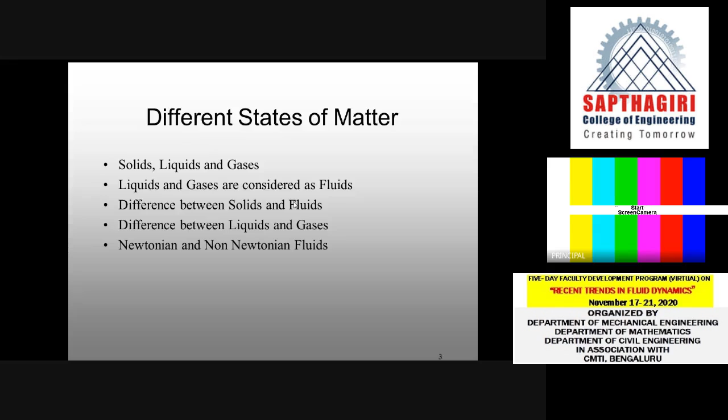Then we have a special category of fluids known as Newtonian fluids and non-Newtonian fluids. There is a law known as Newton's law of viscosity. If any fluid obeys Newton's law of viscosity, we call it a Newtonian fluid. If any fluid does not obey Newton's law of viscosity, we call it a non-Newtonian fluid. I'll come to Newton's law of viscosity and examples for Newtonian and non-Newtonian fluids later.

Now the question is, why are we giving a lot of importance to fluid mechanics, not only in this particular workshop or FDP, but even other than that? Usually fluid mechanics is one of the thrust areas. Why we consider fluid mechanics most important, that is the thing.

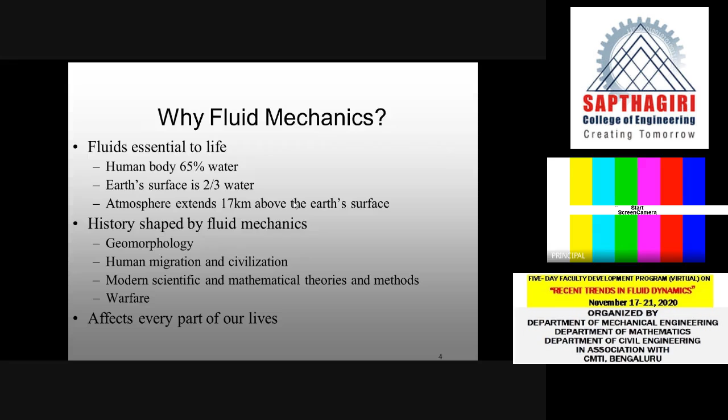First, fluid is very much essential to life. It is found that almost 65% of the human body contains water. Earth's surface is surrounded with two-thirds water. The atmosphere extends 17 kilometers above the Earth's surface, and there is even a historical background for the importance of fluid mechanics.

The fluid mechanics equations have frequently been taught to students. Students have heard of and we have frequently referred to things like Archimedes' principle, Newton's second law of motion, Bernoulli's equation, Euler's equation, Navier-Stokes equation, and Reynolds number. So many things we have taught in class. But I don't know whether we have really shown students the scientists who are really responsible for these concepts.

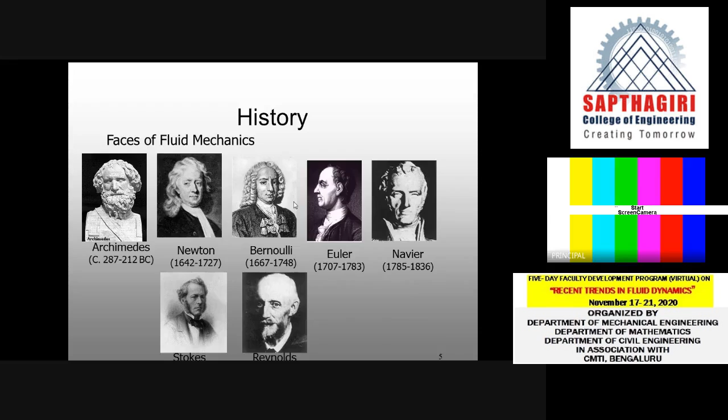I would like to present this particular slide where you can see the photographs of all these scientists. If these scientists had not been there, fluid mechanics concepts would not have been there today. That is why I think it's very important to give respect to these scientists, and at least by seeing their photographs, we'll try to respect them. You can see the photographs of Archimedes, Newton, Bernoulli, Euler, Navier, Stokes, Reynolds, and other such people here.

Now I will not go into this, we all know this. Fluid mechanics is a branch of science which deals with fluids either at rest or in motion. Fluid mechanics can be mainly classified into three types: fluid statics, fluid kinematics, and fluid dynamics. The study of fluids at rest we call fluid statics. The study of fluids in motion without considering the external forces acting on the fluid we call fluid kinematics. The study of fluids in motion considering the external forces acting on the fluid we call fluid dynamics.

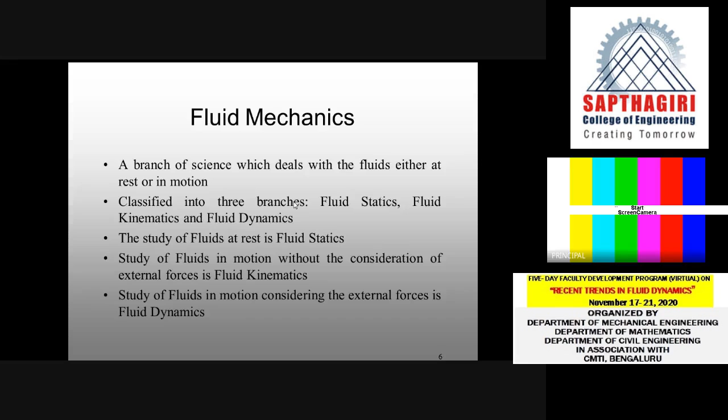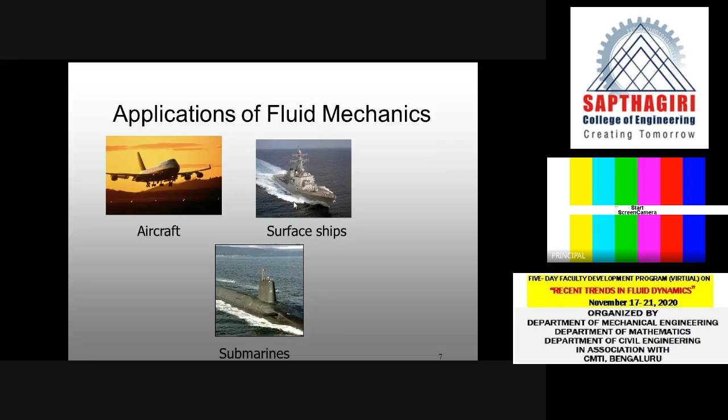Anyway, the importance of today's topic is related to fluid dynamics only. If you ask me what the applications of fluid mechanics are, I will ask you in turn where exactly the applications of fluid mechanics are not there, right? Because there are plenty of applications of fluid mechanics, starting from aircraft, surface ships, air pollution, river hydraulics, blood pumps, water sports, hurricanes, and so many things.

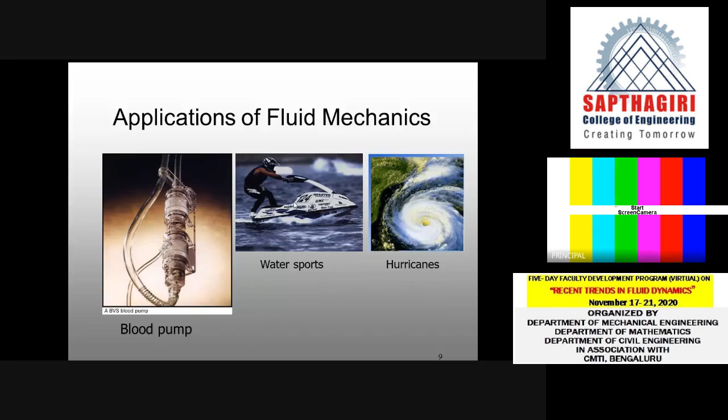If you consider it machine-wise, that is, which machines operate based on the concept of fluid mechanics, there are many machines. Many of them, the prominent ones, include engines, turbines, compressors, pumps, rockets, jets, heat exchangers, etc.

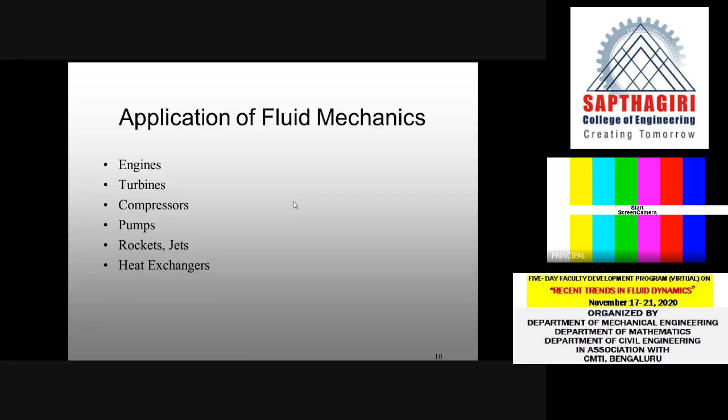There are two approaches which we usually commonly use in fluid mechanics. One is known as the Lagrangian approach, the other is the Eulerian approach. In the Lagrangian approach, each and every fluid particle is followed during its motion. You know that during the motion of a fluid, there are many fluid particles which are flowing.

Each and every fluid particle is followed during its motion, and for each fluid particle we try to measure the velocity, pressure, density, etc. Whereas in the Eulerian approach, we don't follow each and every fluid particle. Instead, we allow the fluid particle to pass through a cross section, and at that cross section we try to measure the velocity, pressure, density, etc. of the fluid particle. So the second approach is a little easier compared to the first, because in the first approach you are supposed to follow each and every fluid particle, which is very, very difficult, and you must describe the properties of each fluid particle. That is why in fluid mechanics applications, the Eulerian approach is commonly used compared to the Lagrangian approach.

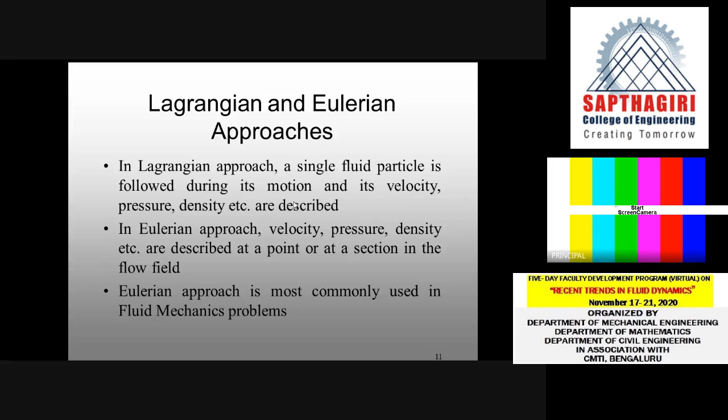Now let me come to this. We have different types of fluid flow like steady, unsteady, uniform and non-uniform, laminar and turbulent, compressible and incompressible, rotational and irrotational, one, two, three-dimensional. I will not go into the details of this. In some cases the fluid properties vary with respect to time, in some they do not. In uniform flow, velocity is not a function of space; in non-uniform flow, it is a function of space. Compressible and incompressible we have already considered. So we have different types of fluid flow as well.

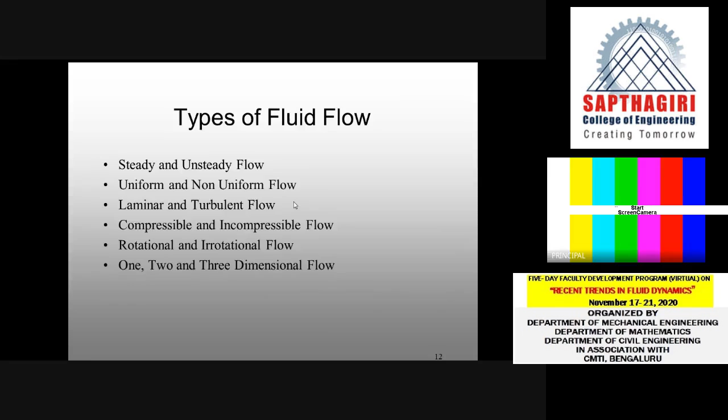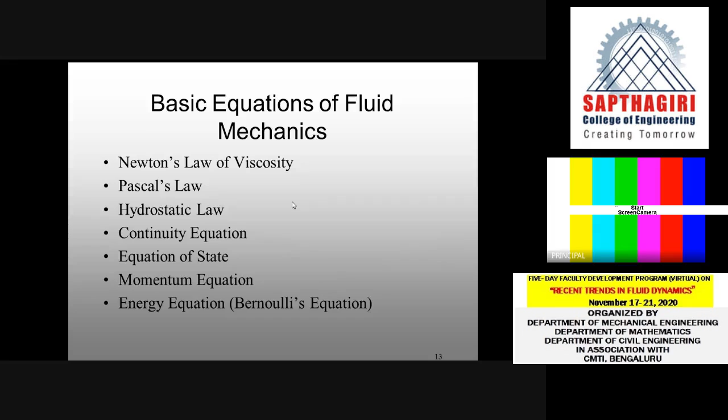Now I would like to concentrate more on this, because everything we talk about in computational fluid dynamics or fluid dynamics is based on the fundamental equations of fluid mechanics. So what are the basic equations of fluid mechanics? These are the basic equations which can be listed. Without them, none of the fluid dynamics concepts, fluid kinematics concepts, or fluid statics concepts can exist. It starts with Newton's law of viscosity, then Pascal's law, then hydrostatic law, then the continuity equation, then the equation of state, then the momentum equation. Finally we have one more equation known as the energy equation, which can also be called Bernoulli's equation. So one by one, let us consider them.

Newton's law of viscosity, I have already told you about. Based on Newton's law of viscosity, we classify fluids as Newtonian fluid and non-Newtonian fluid. Newton's law of viscosity states that the shear stress exerted between two fluid layers is directly proportional to the rate of shear strain. Any fluid which obeys Newton's law of viscosity we call Newtonian; any fluid which does not obey it we call non-Newtonian. There are plenty of examples of Newtonian fluids, including water, air, petrol, kerosene, diesel, etc. They are all Newtonian fluids.

But if you ask students or even teachers to list some non-Newtonian fluids, I don't know how many would be able to. Let me tell you now, there are plenty of non-Newtonian fluids. Our blood is a non-Newtonian fluid. Toothpaste gel is a non-Newtonian fluid. Butter is a non-Newtonian fluid. All plastic fluids are non-Newtonian fluids. Suspensions and slurries are also non-Newtonian fluids.

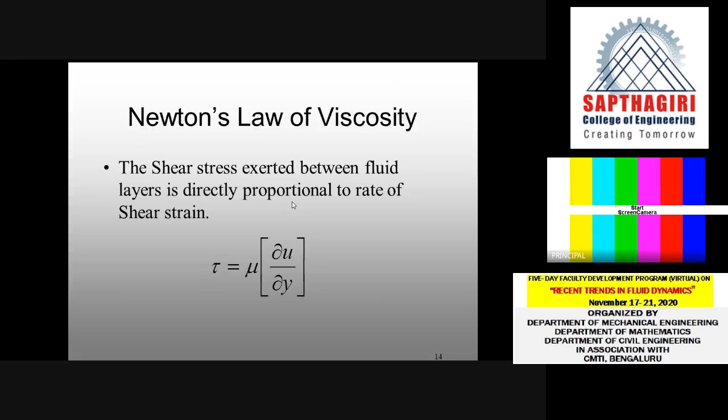Now let us come to Pascal's law, which we study in hydrostatics, that is fluid statics. According to Pascal's law, the pressure at a point in a static fluid is the same in all directions. That is, if you consider the pressure in the x, y, and z directions in a static fluid, it remains the same in all directions.

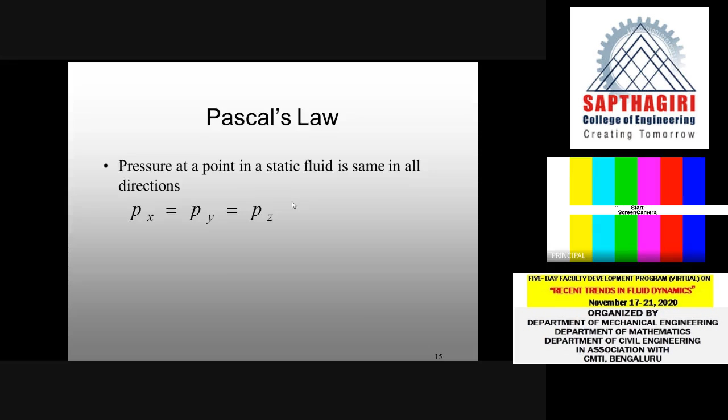Then let me come to the hydrostatic law. According to hydrostatic law, the pressure head of a fluid is the ratio of the pressure of the fluid to its specific weight. P is the pressure of the fluid, and rho g is the specific weight. The most important application of hydrostatic law can be observed in a swimming pool. You know we usually say a swimming pool has a depth of 4 feet, 5 feet, 6 feet, like that.

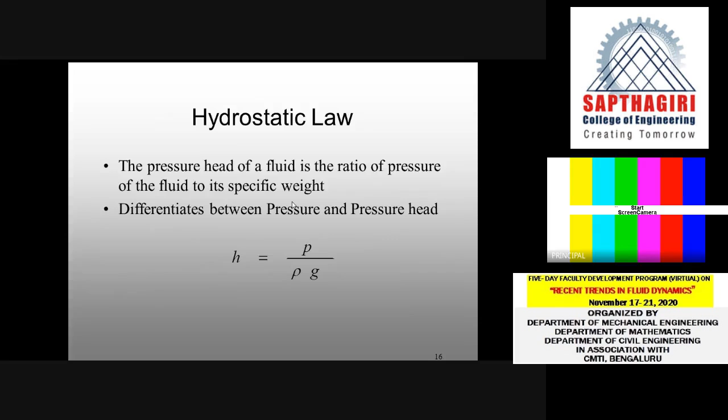It is a common tendency to ask: if you go to a depth of 2 feet inside water in a swimming pool, what will be the pressure? And if you go to a depth of 4 feet, what will be the pressure? We all know that at 4 feet, the pressure will be more than at 2 feet. That means as the depth increases, the pressure also increases. That is very much evident, and it is proved by hydrostatic law only. That is how the hydrostatic law plays a very important role in such applications.

Now let us define two very important non-dimensional numbers, especially these two that take a lot of significance in the study of computational fluid dynamics. One is the Reynolds number, the other is the Mach number. Reynolds number is the non-dimensional number used to predict the nature of incompressible fluid flow, while Mach number is a non-dimensional number used to predict the nature of compressible fluid flow.

Whenever we are analyzing a liquid, we analyze it through Reynolds number. Whenever we are analyzing the flow of a gas, we analyze it through Mach number. Reynolds number is defined as the ratio of inertia force to viscous force, and it is a very important non-dimensional number which signifies the nature of flow, telling us whether the flow is laminar or turbulent.

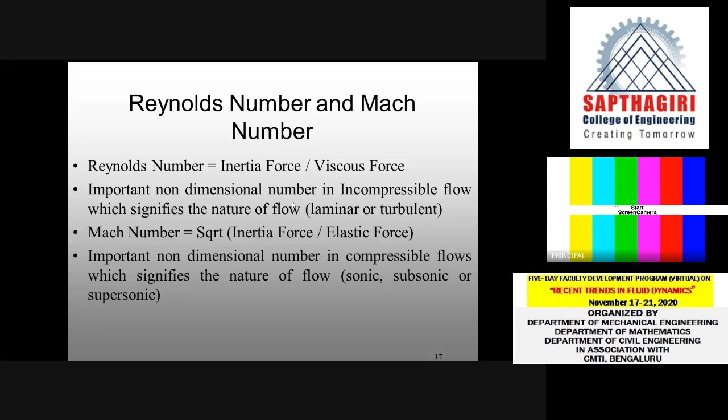Similarly, Mach number is defined as the square root of the ratio of inertia force to elastic force, and it is a very important non-dimensional number used in compressible fluid flow. It signifies the nature of the flow—based on the value of Mach number, we can say whether the compressible flow is sonic, subsonic, or supersonic.

Now let me come to fluid dynamics. Fluid dynamics is a very important branch of fluid mechanics which deals with fluids in motion, considering all the external forces acting on the fluid. So whenever the fluid is in motion, what could be the different forces acting on it? There are different forces like force due to pressure, force due to viscosity, and force due to turbulence.

Sometimes there are some body forces. What do you mean by body forces? Body forces are the forces due to the self-weight of the fluid. Then there could be some forces due to surface tension, etc.

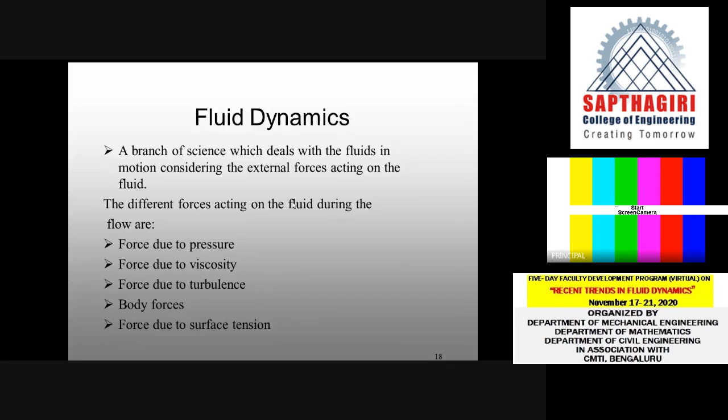So now, before I start with the concepts of CFD, let me come to CFD. CFD is very important because, to analyze fluid flow, you can use three important methods: one is the experimental method, the second is the theoretical method, and the third is the numerical method.

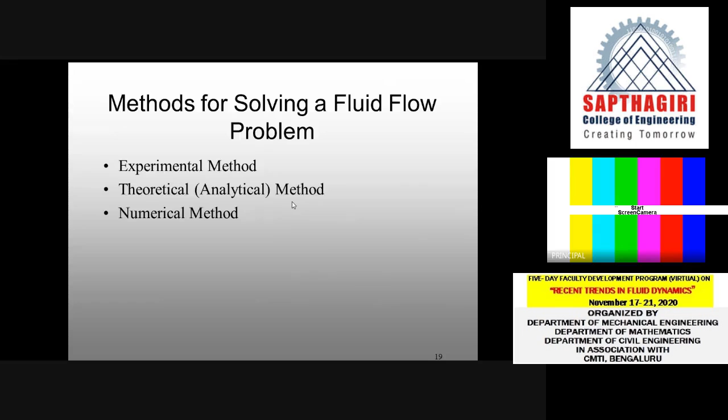Whenever I consider a fluid flow problem, I can also solve such a problem for heat transfer. That is why, whenever I talk about a fluid flow problem, I also bring in heat transfer, because to solve any heat transfer or fluid flow problem, three approaches can be used: the experimental approach, the theoretical approach, and the numerical approach. That numerical approach, we call CFD. Let me come to that later. First we talk about the experimental, theoretical, and numerical approaches, then we compare all three, and then in particular we talk about the numerical approach.

You know that people doing PhD, or those who have already completed it, especially faculty members, might have heard that your PhD will have more value if it is substantiated with experimental results. If you don't have substantiation with experimental results, validation may be a big problem—though you may validate it with some literature, that's a different case. But experimental results are more courageous and are respected more compared to analytical or numerical results, because experimental results are capable of being more realistic.

We have an equipment with us and we have the ready-made, or we have got the proven values with us, right? With all this, we can prove a concept. So that is why the experimental methods or experimental results are more respected compared to analytical results or numerical results.

There are disadvantages also in the experimental approach. To do any experiment, equipment is required, so the equipment will be very, very costly. There may be a scaling problem. For example, if you want to do the experiment with a hydraulic turbine, you cannot build the experimental setup of the actual hydraulic turbine. You will have to build a small one. So how do you scale it is the problem.

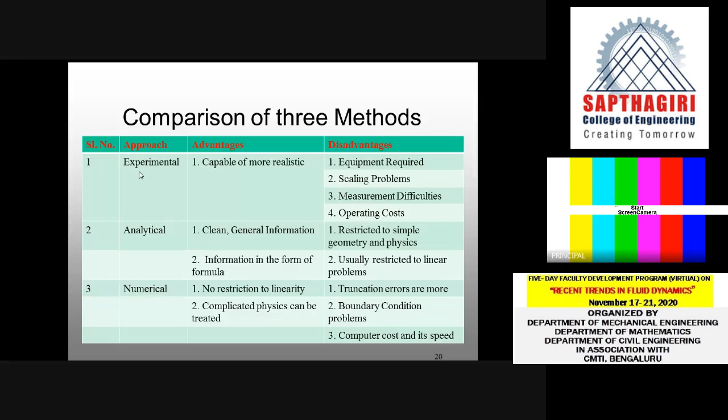So then, what is computational fluid dynamics? Computational fluid dynamics, as it is said, means we are trying to solve a fluid dynamics problem using a computational method. Such a thing we call computational fluid dynamics. So CFD is going to predict what will happen or what may happen quantitatively when the fluid flows with these conditions. What are those conditions?

There could be a simultaneous flow of heat apart from fluid flow. There could be simultaneous mass transfer apart from fluid flow. There could be simultaneous phase change apart from fluid flow. There could be some chemical reaction apart from fluid flow. Sometimes there may be mechanical movement also. CFD can handle this kind of problems.

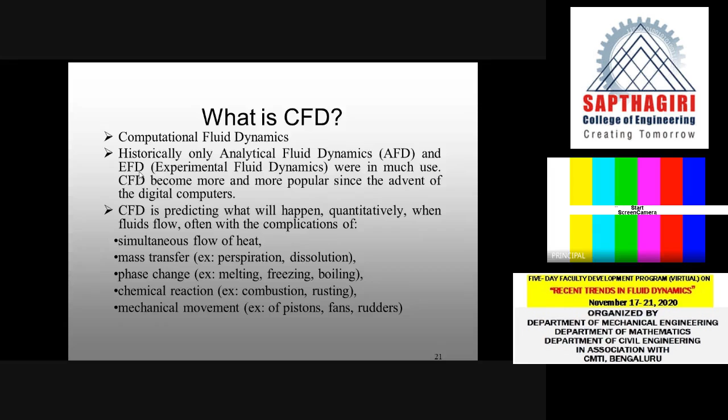So then, what are the steps involved in CFD? First, we need to understand the physics of the problem. What do you mean by physics of the problem? Let me give you an example. Let us say I will take a very simple example. Water is flowing through a pipe, right? When the water is flowing through a pipe, what we need to measure or predict there, maybe one is the velocity of the fluid. The other one is what may be the pressure at the inlet, what may be the pressure at the outlet.

To do this, first we need to understand the physics of the problem properly. Then we'll have to do the modeling. Then we'll have to define the proper boundary conditions. Then we'll have to solve it numerically. Then we should present the results in the form of visualization. If you want to complicate the same example a little bit more, I will say that water is flowing through a pipe, but the pipe is kept in the sunlight at 12 o'clock in the afternoon.

What happens now? Sunlight is going to be there on the pipe. Naturally, the pipe surface gets heated. From the surface of the pipe, the heat is transferred to water. So there may be conduction effects, convection effects, and radiation effects also from the sunlight to the surface of the pipe. All these things can be added apart from solving the pressure and the velocity of the fluid. All these things are going to be dealt with in a proper way in computational fluid dynamics or CFD.

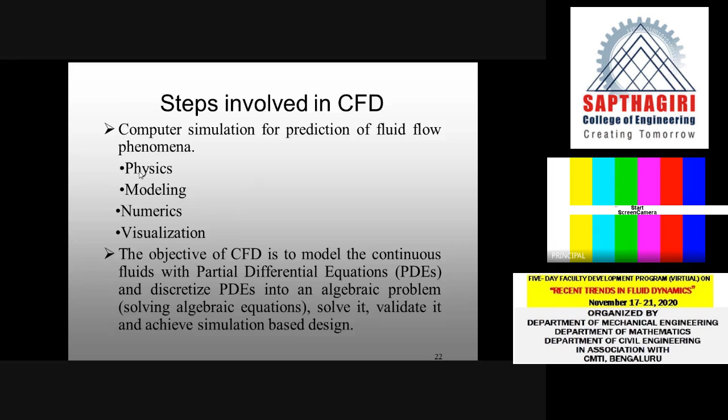Then try to convert the physics of the problem either to an ordinary differential equation or to a partial differential equation. Then try to solve that ordinary or partial differential equation using some suitable method. This is what we do overall in CFD.

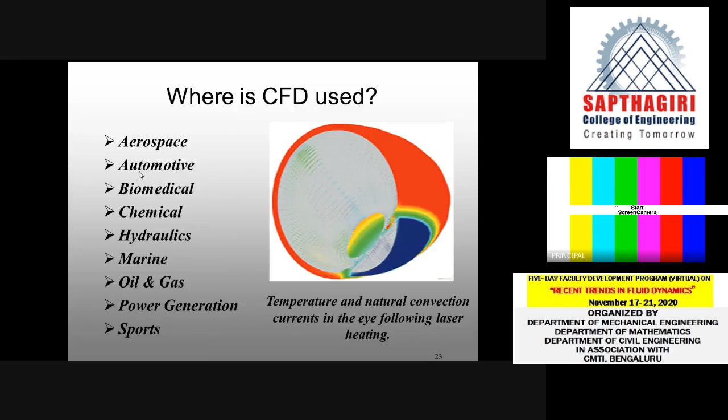Okay, now the next thing, I have given the heading as where is CFD used. I should give the heading as where is CFD not used. In fact, nowadays CFD has become a trend; it is used everywhere, including in aerospace, automotive, biomedical, chemical, hydraulics, marine, oil and gas, power generation, sports, etc. The figure you can see in this slide also shows temperature and natural convection currents solved using CFD. Anyway, I will not go into the details of that.

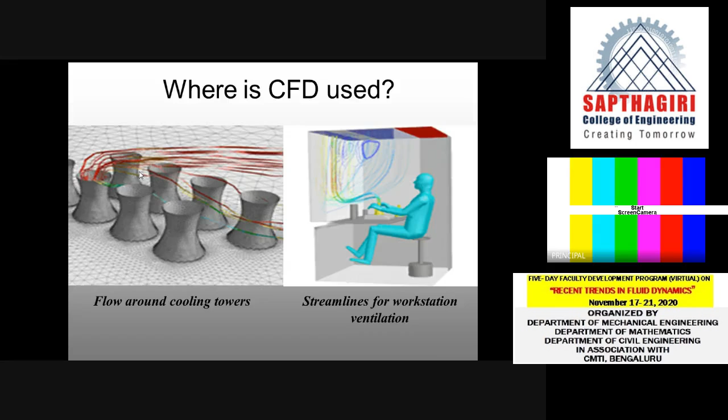You can see some more things which are solved using the CFD technique. The first one is flow around a cooling tower. The second one is streamlines for workstation ventilation. These are some of the studies carried out using CFD. Nowadays, even in biomedical science, people are using CFD. The blood pressure can be controlled using CFD, and also the blood pumping to the brain can be analyzed using CFD.

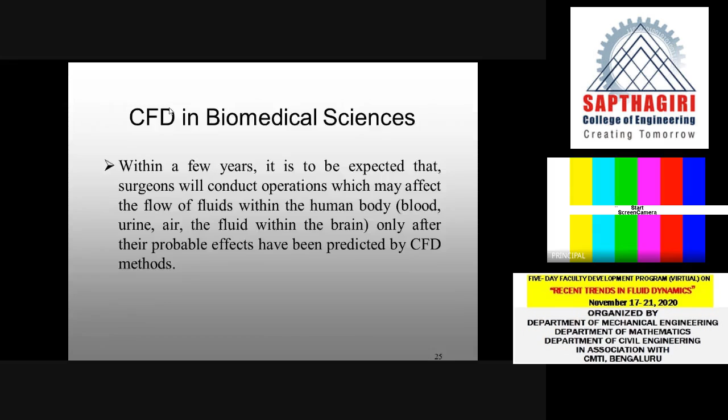And the urine amount can be predicted using CFD. So a lot of applications are there, even in biomedical sciences. Already our doctors are using this technique to predict all this. So now the question is, can CFD be really trusted? If you ask me personally, I say no, you cannot trust CFD completely. Why can you not trust CFD completely? I will come to the details of that a little later.

Now, importantly, three things. First, the input data may involve too much guesswork or imprecision. That means, let us say we wanted to solve a problem using the Navier-Stokes equation. The Navier-Stokes equation has a lot of terms, so it is very difficult to solve all those terms together. That is why we make some assumptions and then try to solve the equation. When you make assumptions, you will get the result, but it may not be exactly near the actual one. So that is the major problem with CFD.

The available computer power may be too small for high numerical accuracy. The scientific knowledge base may be inadequate. I think that is the most important thing. The scientific knowledge base may be inadequate in the sense that whatever boundary conditions we give may be wrong because of our limited knowledge about the physics. If we have defined the physics itself wrongly, naturally the result will also be wrong. That is why CFD cannot be 100%.

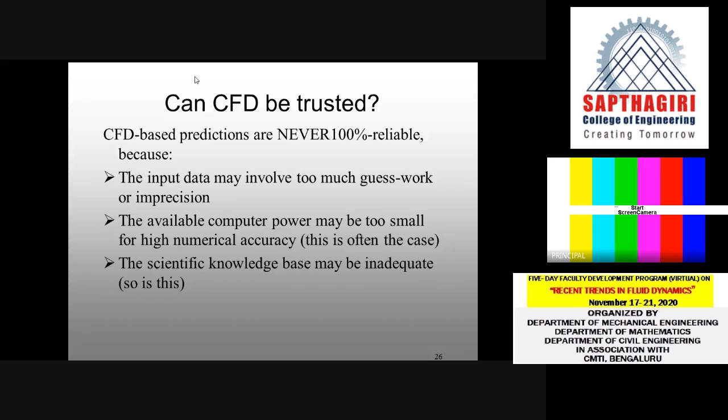CFD is more reliable in solving single phase flow rather than multi-phase flow. CFD solutions can be more reliable for chemically inert gases rather than chemically reactive materials. The CFD results are more reliable for simple fluids rather than those of complex composition. So therefore, for everything you cannot depend on CFD, but you cannot leave CFD also.

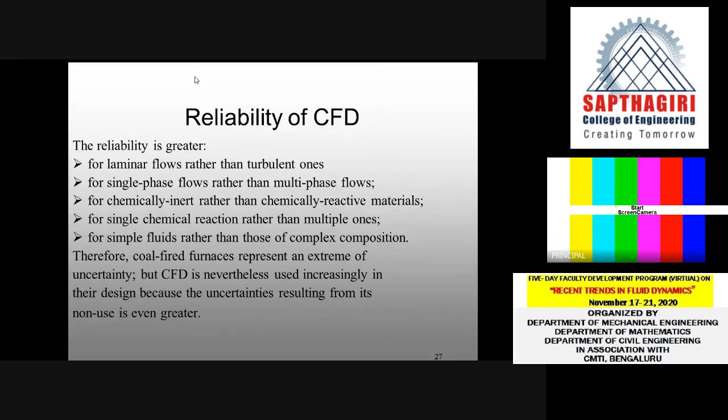First, we need to understand the fluid mechanics: whether it is an inviscid flow or viscous flow, laminar or turbulent, compressible or incompressible. Then we are supposed to convert the physics in the form of equations. After converting the equations, we'll have to solve them using some proper numerical method. Then we will have to analyze the results. This is all about CFD. Okay, I have told you already.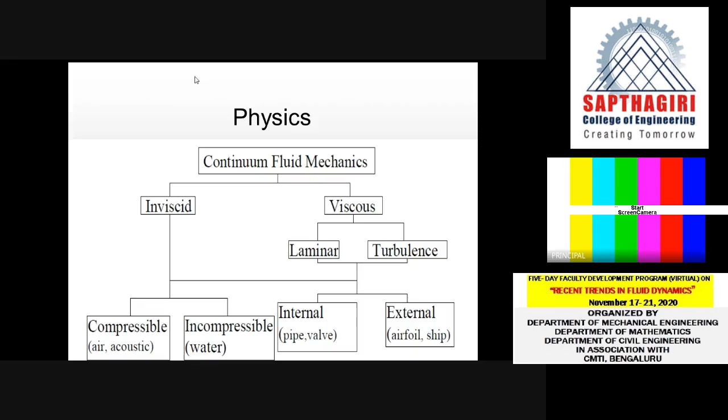So first you will have to do the discretization. After discretization, convert the physics of the problem to either an ordinary differential equation or a partial differential equation. Then that will get converted to a system of algebraic equations. Try to get the numerical solution of these equations using a proper condition.

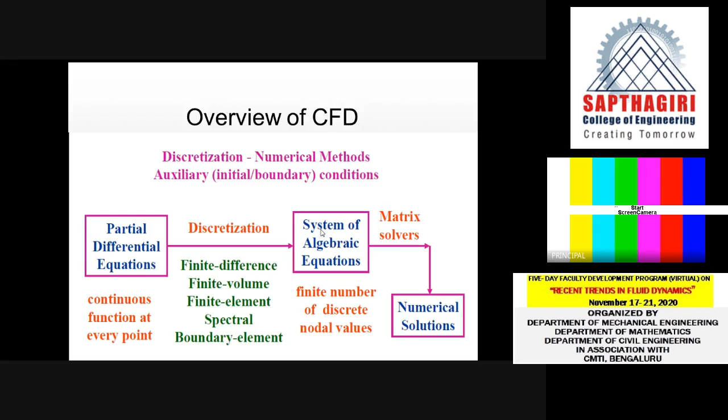To do this, usually in CFD, we use three important methods. One is the finite difference method, the second one is the finite element method, and the third one is the finite volume method. Usually the finite difference method is based on the differential equations. In the finite volume method and finite element method, we try to convert the physics of the problem in the form of an integral equation rather than a differential equation.

What are the flow conditions you will usually come across while studying CFD? The flow may be viscous or inviscid, external or internal, laminar or turbulent, compressible or incompressible, single phase or multi-phase, or it may include thermal effects, density effects, etc.

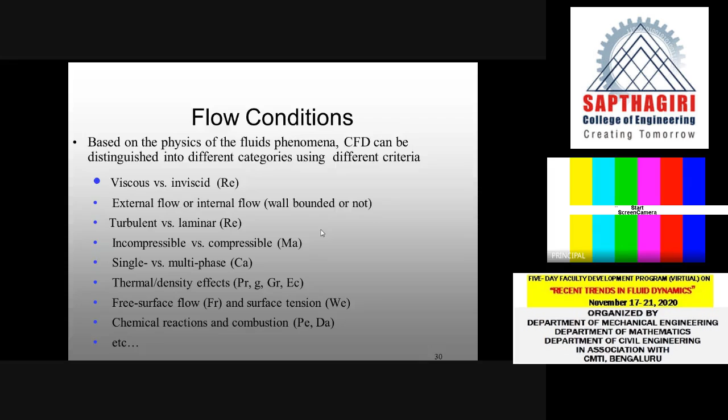But before that, let me talk about some basic equations. Let us start with the continuity equation. I don't want to go into the equation; let me only tell you its overall meaning. The continuity equation is based on the law of conservation of mass. Whatever amount of fluid enters a section, the same amount should leave the section. Mass of fluid entering a section should equal mass of fluid leaving the section.

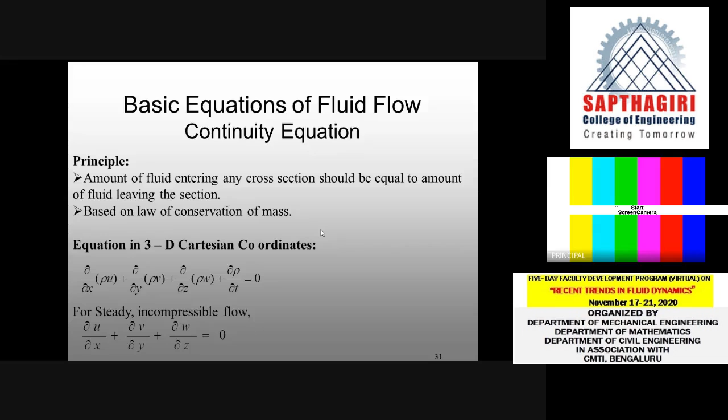Usually these equations are written in three-dimensional fashion as ∂(ρu)/∂x + ∂(ρv)/∂y + ∂(ρw)/∂z + ∂ρ/∂t = 0. Further, these equations can be reduced for incompressible fluid flow as ∂u/∂x + ∂v/∂y + ∂w/∂z = 0.

Now the next one, I take only 2 to 3 minutes for this slide, because the entire fluid dynamics depends on this equation, which we call the momentum equation, also known as the Navier-Stokes equation. The Navier-Stokes equation looks very simple. It is based on Newton's second law of motion, F = ma. The problem looks very simple, but it is not so simple.

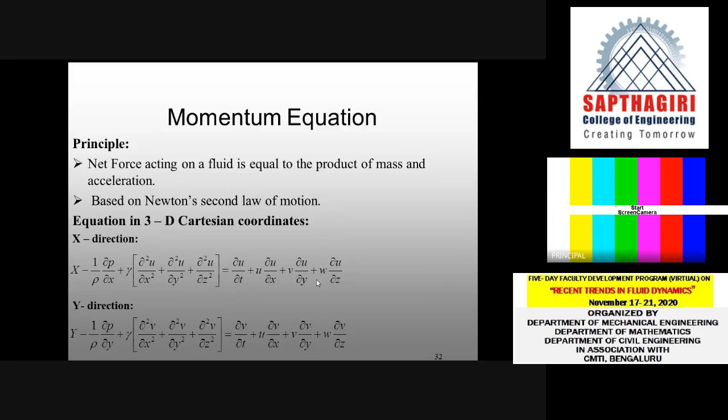As you can see, the momentum equation in X, Y, and Z direction, if you try to solve that simultaneously in all three directions, it's very, very difficult to solve because there are so many terms involved in this. That is why we try to do some assumptions.

What kind of assumption? Sometimes we tell that there is no viscosity. Sometimes we tell that there is no force due to pressure. Sometimes we tell that there is no body force. Sometimes we tell that the acceleration of the fluid is zero. By doing this kind of assumption, then only we try to solve the Navier-Stokes equation or the momentum equation.

At this juncture, I should tell you that so far, the solution of the Navier-Stokes equation is one of the thrust areas. Nobody is able to solve the Navier-Stokes equation keeping all the terminologies intact. Nobody is still able to solve the Navier-Stokes equation completely. Whatever solutions are available for the Navier-Stokes equation, all those solutions come with a lot of assumptions only.

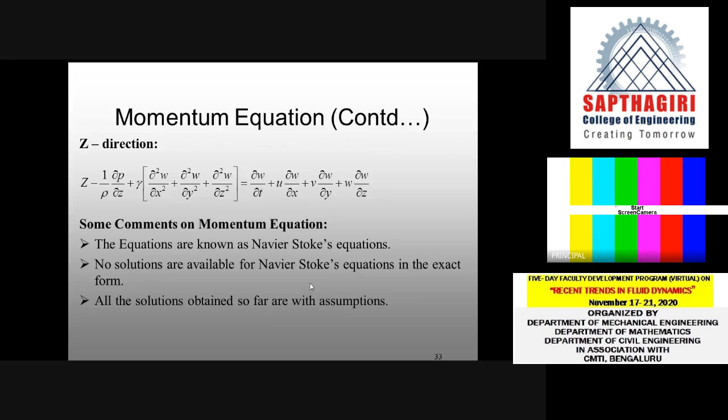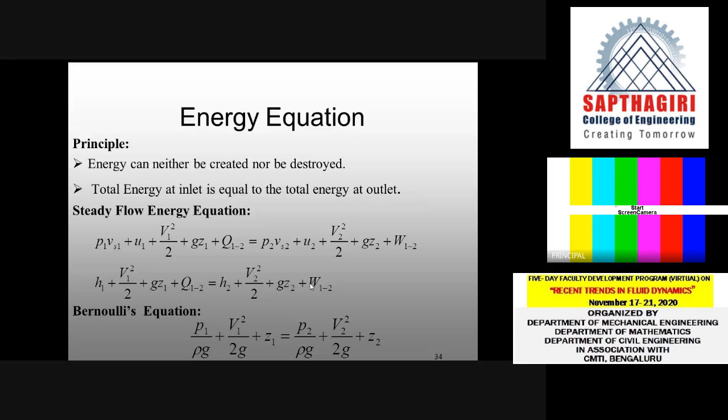So that is why this equation plays a very important role in the solution of CFD. Then the energy equation, which we also call the steady flow energy equation or Bernoulli's equation, which we write in the form of P1 by rho g plus V1 square by 2g plus Z1 equal to P2 by rho g plus V2 square by 2g plus Z2 and all that. All these kinds of basic equations are used in computational fluid dynamics.

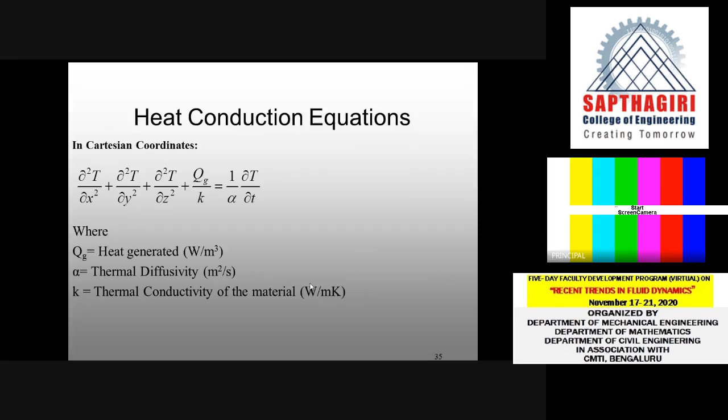And whenever heat transfer comes into picture, we use the heat conduction equation like dou square T by dou X square plus dou square T by dou Y square plus dou square T by dou Z square plus Qg by K equal to 1 over alpha into dou T by dou T. Of course, this is only in Cartesian coordinates. Similar kinds of equations are to be considered even in cylindrical and spherical coordinates.

Now, the most important thing, as I have told you already, is that in any CFD problem, first you will have to understand the physics, convert the physics to a differential equation. Most of the time it could be either an ordinary differential equation or a partial differential equation. So the partial differential equation plays a very important role in the CFD solution of a problem.

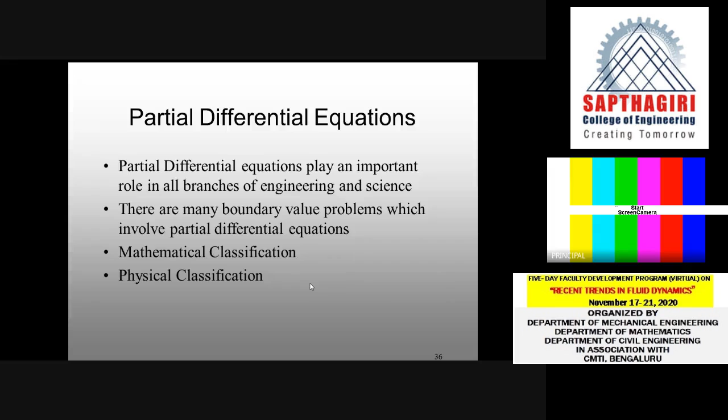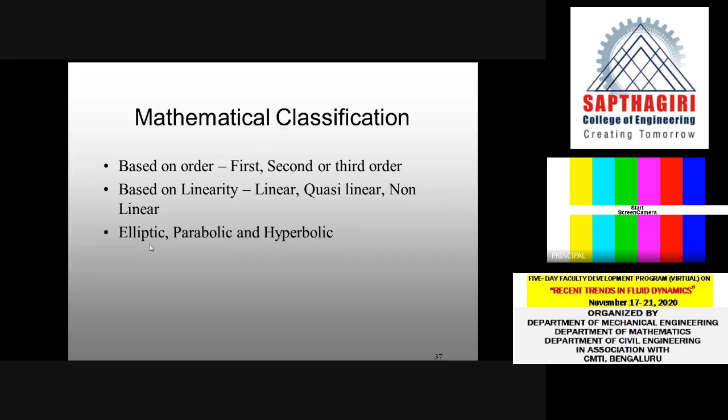The partial differential equations can be classified into two types: mathematical classification and physical classification. Mathematically, based on order, you can classify a partial differential equation as first order, second order, or third order PDE. Based on linearity, you can classify them as linear, quasi-linear, and non-linear partial differential equations. Then based on whether b square minus 4ac is less than 0, equal to 0, or greater than 0, you can classify that as elliptic, parabolic, or hyperbolic equation.

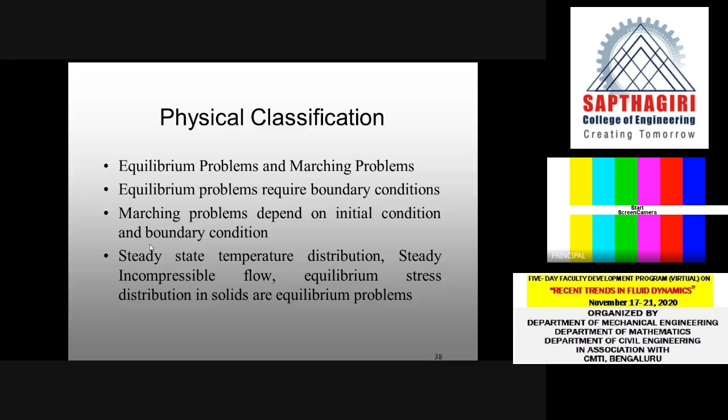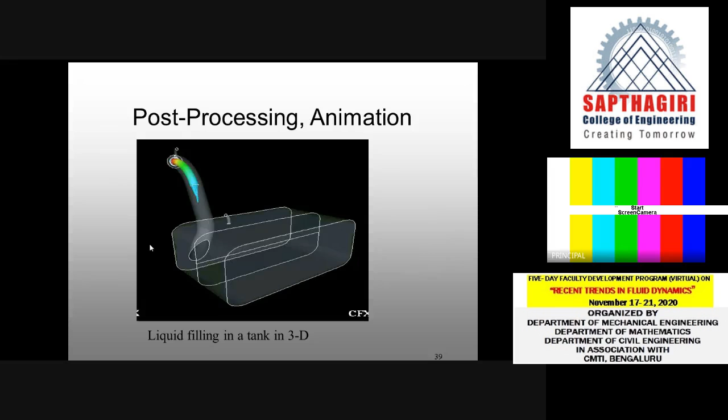Okay, now I don't want to tell you more theory. Before I end my talk, let me show some of the important results we have obtained through CFD. It's not done by me, in fact I have taken it from different sources.

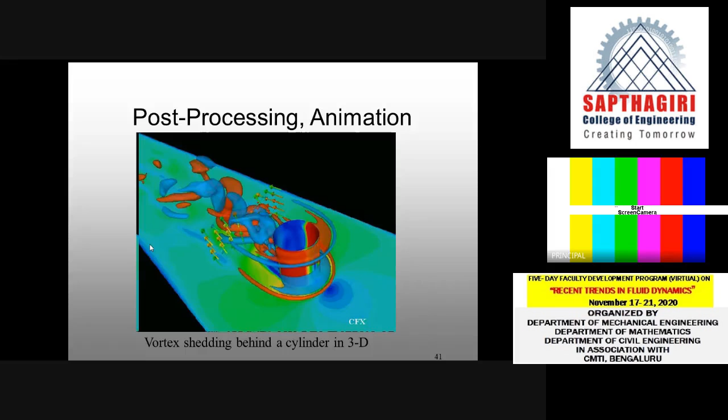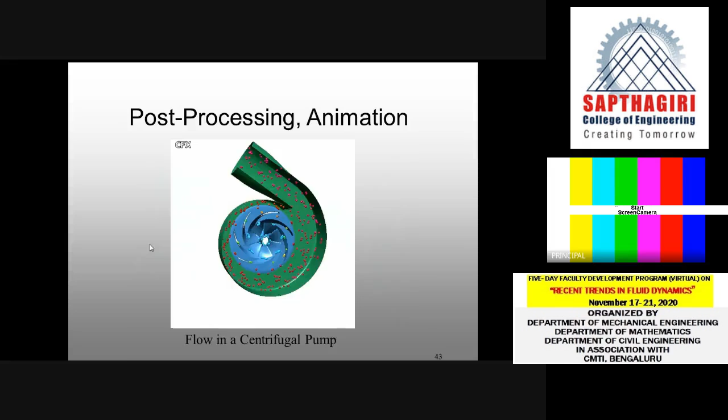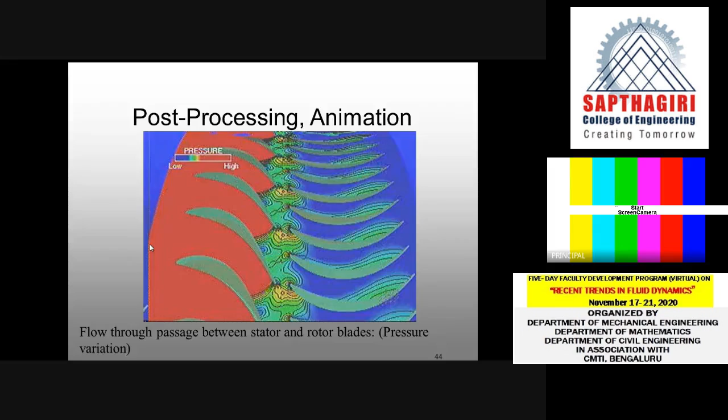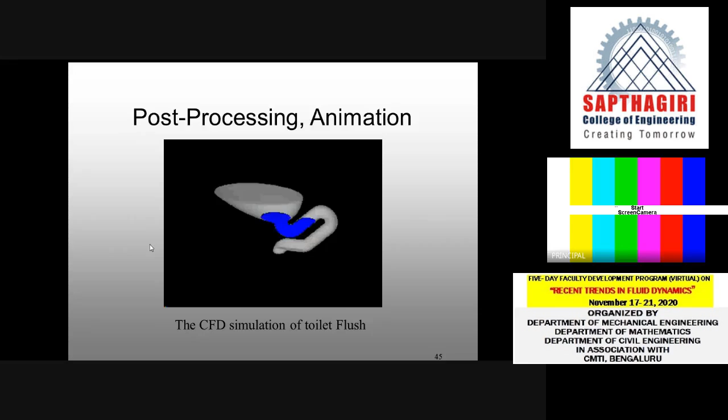So let me summarize now. In this session, we have discussed the basics of fluid mechanics, the basics of CFD, merits and limitations of CFD. We have also considered the procedure involved in CFD, reviewed the basic equations of fluid flow and heat transfer, and finally discussed some of the practical applications of CFD. I think these are the things we have discussed today.

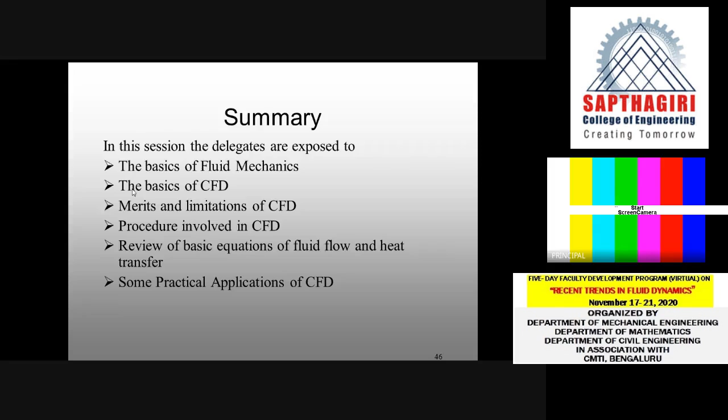Hello, hello, hello. Any questions from participants? Hello. Any questions? Let me assume that there are no doubts.

Sir, people will not get doubts in only two cases: if they have understood everything, they will not get a doubt, and if they have not understood anything, then also they will not get a doubt. No sir, being a fluid dynamics person myself, your lecture was fantastic, sir. We started from basics, I wish your session had been the first session of our program. Thank you, sir. Now I request the HOD of Mechanical to render the vote of thanks, sir.